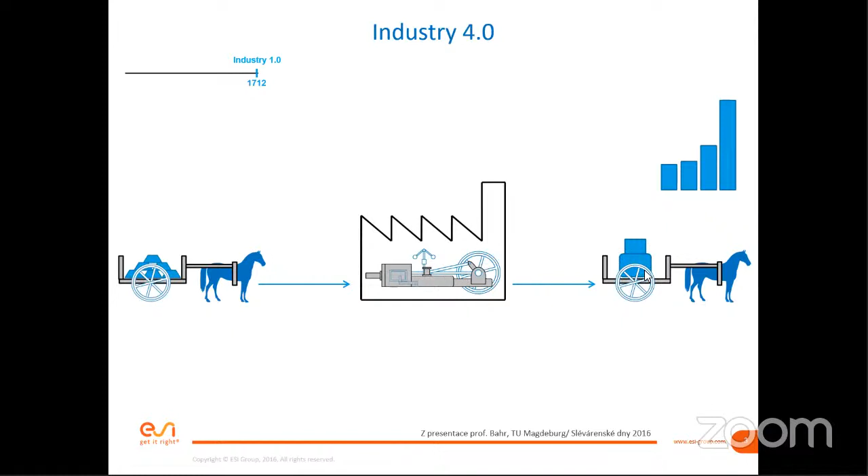In Industry 2.0, the horse was somehow substituted with the car. The amount of input was of course much higher. There was industrialization from the plant point of view — production lines, power plants somehow feeding the plants supporting the production, and the production of the parts was much bigger in amounts and whatever.

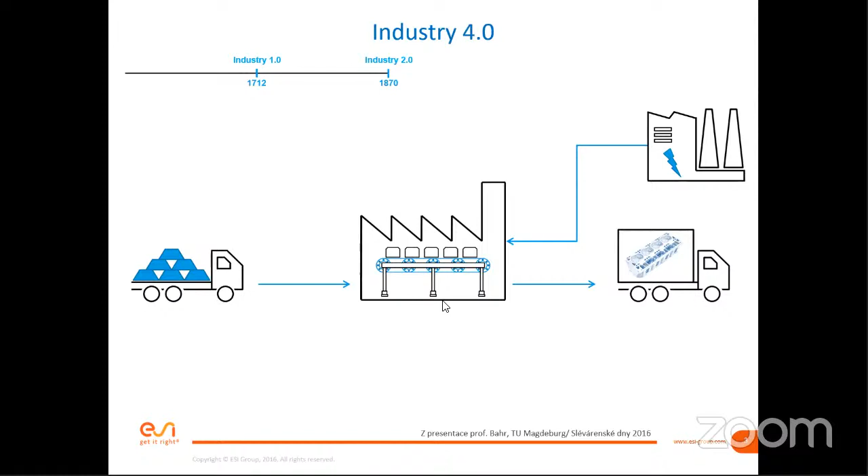This is Industry 2.0, and then what is already more close to our age is Industry 3.0, where all these processes were somehow supported by robots, automatization, and CAD modeling — computer aided design.

Simply the production could use much more tools which came from the automatization and computer aid for the process. And what is...

What is happening right now, we call it Industry 4.0. I'm using the term as if it's tomorrow, but it's already been a few years - it's a known era where we collect the data from all these parts of the production process. We can somehow collect this data, and based on it, use it to optimize the production itself.

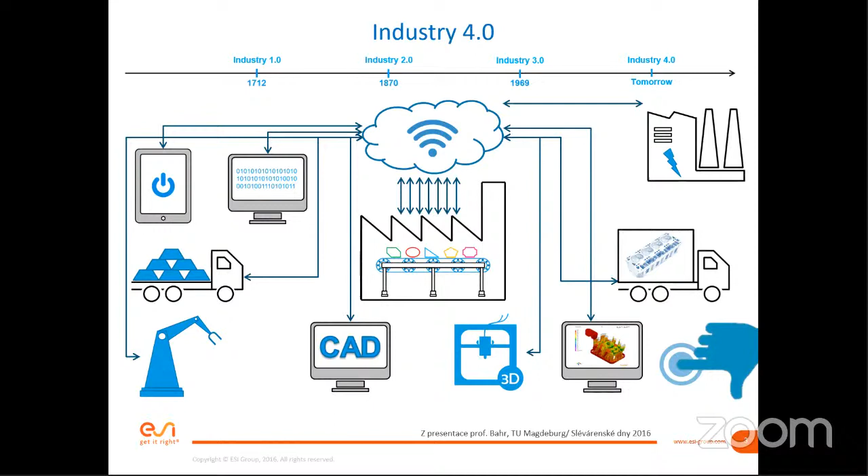So this is something which is very common for this idea of Industry 4.0, to have, let's say, some cloud which works as the one source of truth for a whole process, and can be used for optimizing the process, for improving the process, and that's it basically.

Worldwide, this trend, Industry 4.0, this is a global idea. It's maybe called Industry 4.0, but this is just the name which was somehow thought of in Germany. But any other country worldwide has already presented some strategy for industrialization and for the digitization of the industry - a very similar approach to what was explained on the previous slide. So we really have a worldwide movement, and the industrialization and digitalization is happening right now.

The ideas of Industry 4.0 are represented by 9 different pillars. I can name them: autonomous robots is one of them. Simulation, the support of production by simulation, is the second one. System integration - this is system modeling where you can analyze or describe different systems, hydraulic, thermal, whatever. And Internet of Things.

This is probably what most people connect with Industry 4.0 - the Internet of Things, where you have communication between different machines, between different things, computers, people, of course. This goes hand in hand with cybersecurity, cloud. There are new manufacturing approaches like additive manufacturing, and the 8th pillar can be virtual and augmented reality.

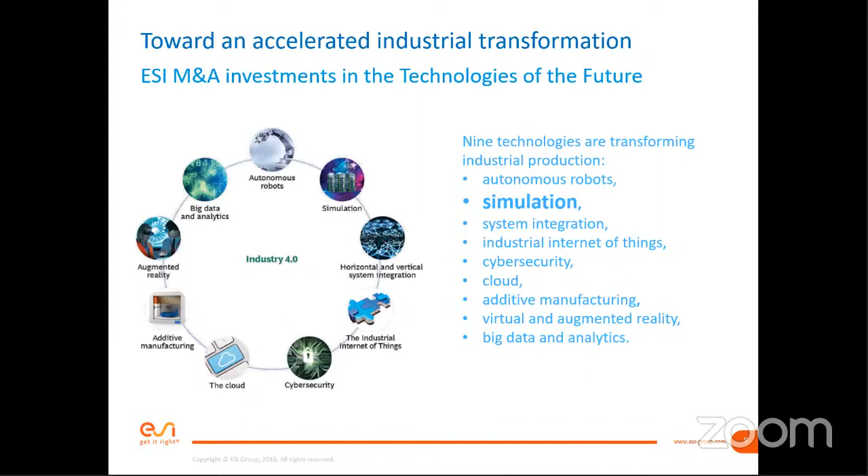And there are companies in the world which offer solutions for each of these 9 pillars. There are also some companies - ESI, my company, is actually one of the pioneers of this approach, to present solutions for each of the 9 pillars, combining them and introducing the most advanced approaches in presenting these Industry 4.0 ideas. I will show some examples later.

This brings me to the concept of the digital twin. Digital twin is something created, or the idea was formed, at the University of Michigan by Dr. Grieves in 2002. It was named at the time 'digital twin,' but actually what it means is that the real space can somehow not be substituted, but filled in with some virtual space approach.

If you, for example, think about a car, these days the car collects data and sends it to the service, and this can apply to everything, imagine with many things in our life. Simply, you have some real thing and a virtual model which simulates the real thing, but not only that - it also uses the real data to simulate it and optimize it and find a better solution which can then be used in the real space again. So it's a combination of the real and the virtual space.

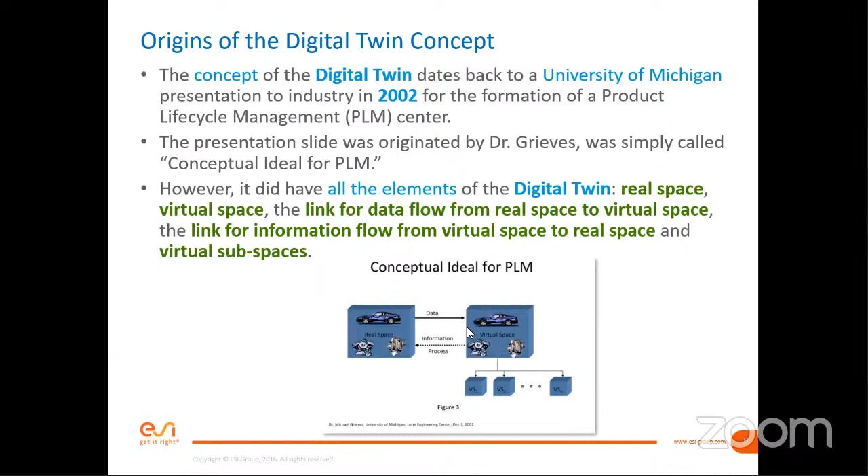If I can show one example, this is a picture from a video which can be found on YouTube, done by GE. This is a steam turbine. I don't know how many similar turbines are installed across the United States, maybe more than 100. This is a nice example of a digital twin, because these 100-plus real steam turbines installed all over the country have a digital twin.

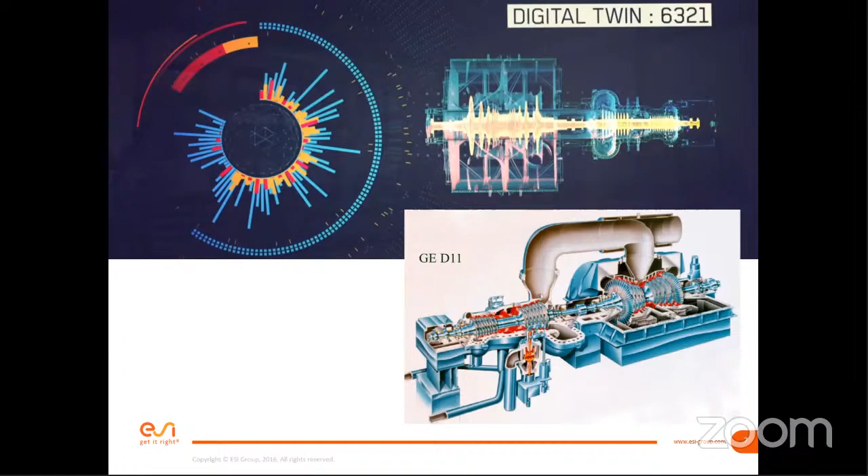It has some mathematical model which collects the data from all these 100-plus steam turbines and uses this data to learn something about what can happen in reality, but in the virtual space. And once it learns such a thing, it can then be used for reasoning, for optimizing the process. We can divide this work into 3 different areas. The first area would be to collect the data and use it for learning what happened, what can happen.

The second thing is the model can use this data to predict some states, to optimize the operation by playing with the steam temperature, rotation of the rotor of the turbine, whatever. Then, of course, it can apply these approaches after some interaction with the people, with somebody who operates it, and really provide improving actions to be used in reality.

But this is a case of turbine steam, one product which maybe somebody can easily think about how this virtualization or digital twin can happen. But if we speak about manufacturing process, casting for example, it's not maybe so easy to imagine how this digital twin should work for something like this.

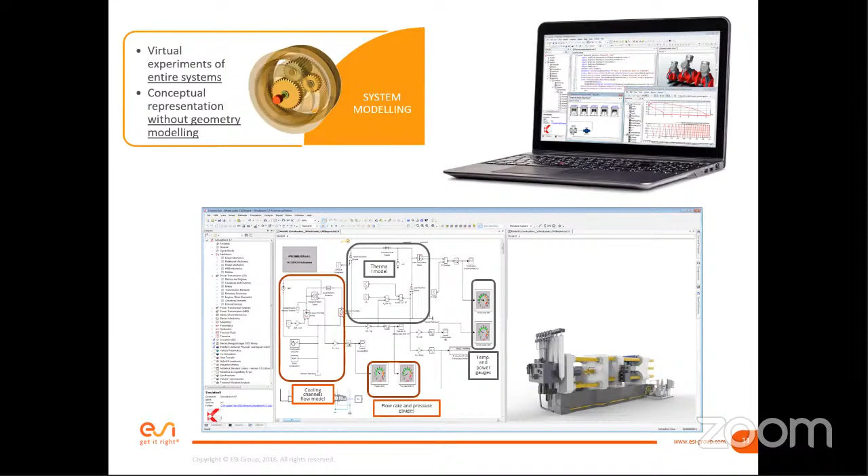Thank you. So we can continue. Okay.

So let me skip to another part of the presentation to introduce the amount of tools which can right now be used by the engineer to switch from the classical trial and error approach to something much different, which can use the advantage of digitalization.

There are plenty of tools which can be used right now, and the biggest advantage is that the process, the usage of the tool, starts in the very first moment of the new part design.

I already spoke about the machine, about how the technology of high pressure die casting works, but let's start from the beginning with the concept of the new part. When you have a new part, the part itself is usually created based on some function, based on some loads of the operation it's designed for.

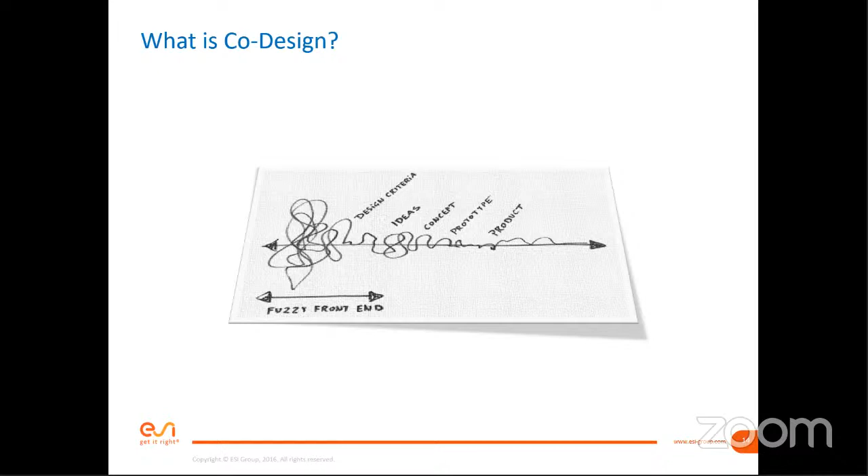So the first thing, and this is the first moment when we can really use the advantage of digitalization, is to use something like the co-design approach of the simulation software, which can be used by engineers and also by manufacturers, doesn't matter, but the best way is to be used by both together when designing a new part. Co-design simply means the approach where we spend most time in the first stage of the process designing the part and using these tools to do it as effectively as possible, instead of doing it without this option and solving many troubles later during the manufacturing process.

You can imagine it in this case, like this casting as a part of some chassis. The part is designed somehow, but when the manufacturers tried to prepare the technology to create such a part by casting technology, it was obvious there were so many problems, so many restrictions given by the design, that from the manufacturing point of view we are simply not able to produce it, or it's too problematic, too expensive, simply not effective and not optimal.

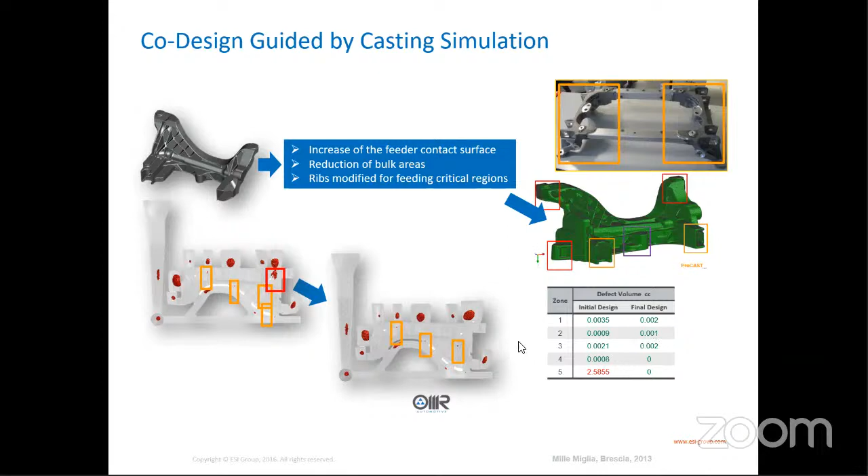You can see that using another approach, what can be reduced is mainly defect volumes, from huge percentage volumetric to really acceptable values. This is the goal, and I will show you how it works on a small example.

This is the case of high pressure casting, some kind of cover with many ribs and different shapes. The casting is quite complex, and parts like this are hotspots from the manufacturing point of view. If the designer puts a hole in this area, it's not 100% certain this hole can be managed during manufacturing. For example, it cannot be cast because it's too problematic, so the casting will be done without the hole, and the hole will be drilled afterward.

Which brings more operations, more cost, everything. So the goal here is to really take into account the castability, the manufacturing process, and design the part a little bit different if possible.

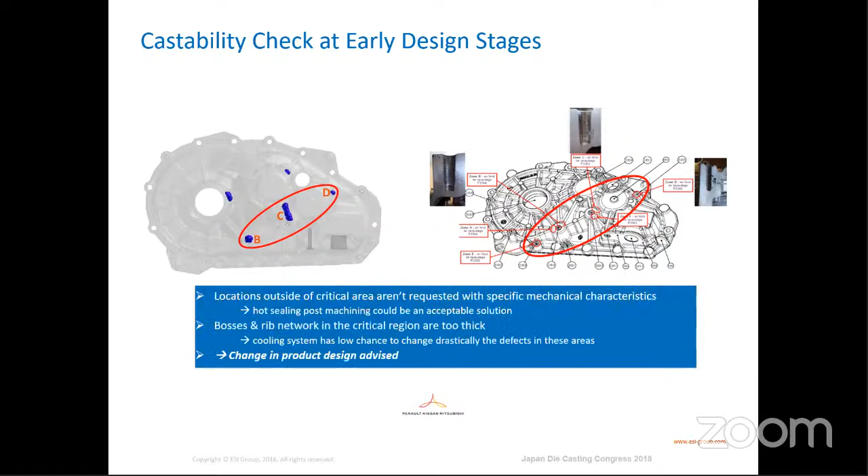And how it works in this case works on 5 simple steps. First, if the designer creates a new model of the part, we only speak about a virtual model - a CAD model prepared in different CAD environments. It doesn't matter. This design is then analyzed from the geometrical point of view.

Based on this first analysis, using very simple automatic tools, a simulation of the solidification is prepared as a thermal analysis of the part. Then the user of this approach has the possibility to review the results for this very short simulation.

Based on this, he will find out what are the critical places of the part, and if possible, in communication with the design department, he can bring some ideas to make the design a little bit different, to simply avoid problems in manufacturing.

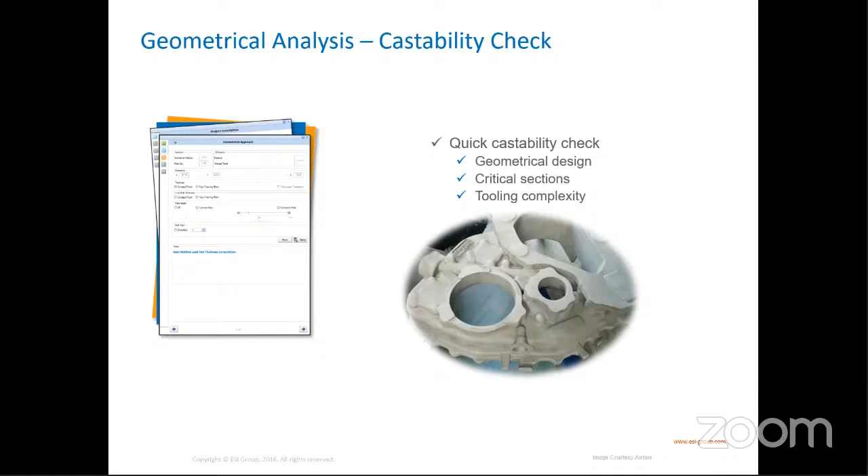So it's not only about the casting itself, but also about the mold or tool which will be used to create it. Just to show you how it can work, we have this very complex casting.

First of all, we can measure the wall thickness of the part. You can see the places where the thickness is thicker, and of course this can be a problem - this different wall thickness for the part. If we see something like this, the goal would be to change the design a little bit to avoid having such different wall thickness in the part.

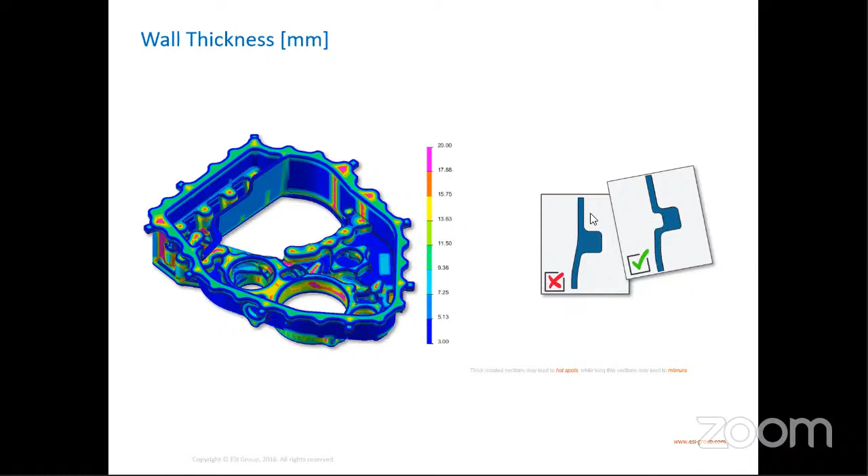Another thing from the castability point of view is the transition between different thicknesses. If we see a case like this, with a thin wall and then a very sharp transition to a thicker wall, it again brings much problem. So the goal would be to think about the design and introduce different thickness transitions using radiuses or other geometrical approaches.

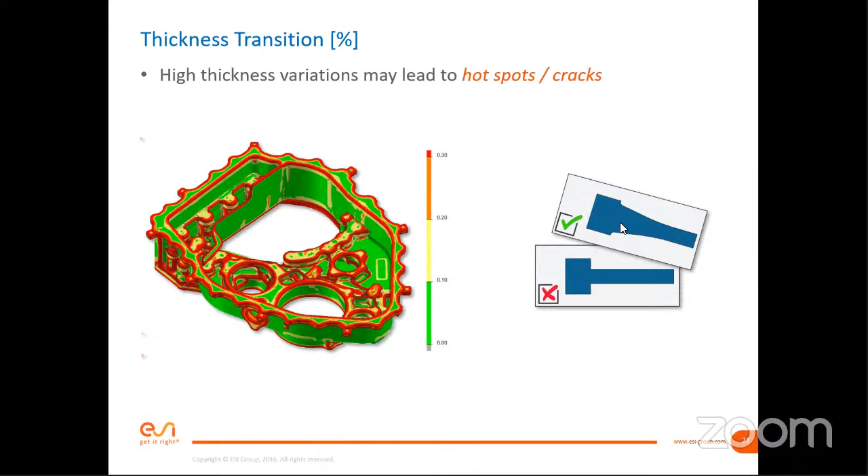So we can see that even comparing two different castings of a very similar part, we can have completely different geometry distribution, which makes one part easy to create and the second part very complex and problematic. That's obvious.

Then we can also do sharp edges analysis. Again, sharp edges are not good from the castability point of view. The goal here would be to create the design as smooth as possible without sharp corners.

And from the molding point of view, with this tool we are able to validate if the part's draft angles correlate with how the mold could be prepared. You can see that if you have a shape without angles, you are not able to produce it, because you can't put it out from the mold. So the goal here would be to do it properly.

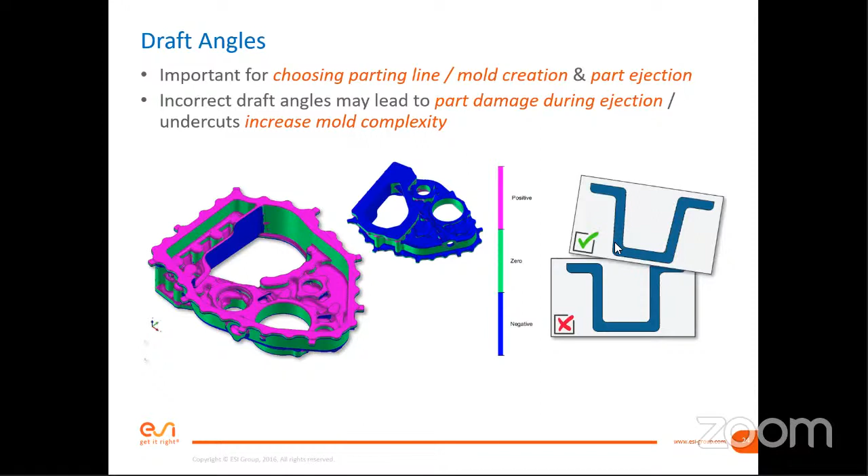One last thing to check is the shape of the mold itself. If you see a casting shape like this, with a very sharp corner in this area, you can imagine how heated up the die will be in this area, because the temperature of the metal during casting - for aluminum about 700 degrees - is much higher than the die.

The die would be at about 200 degrees, and at the casting moment, when heat transfer brings heat from the casting to the die, you will have a very problematic area here, probably connected with porosity formation. So the goal would be to reduce such spots to a minimum, and maybe present a different kind of description of the part design in these areas.

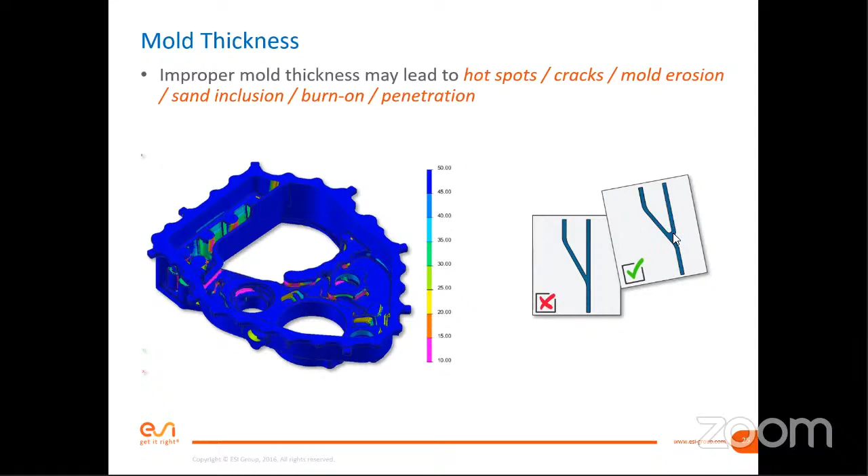And then all this, let's say standard, this geometrical measurement is just a first look on the part design. The second look would be to perform a very simple simulation of solidification of the part.

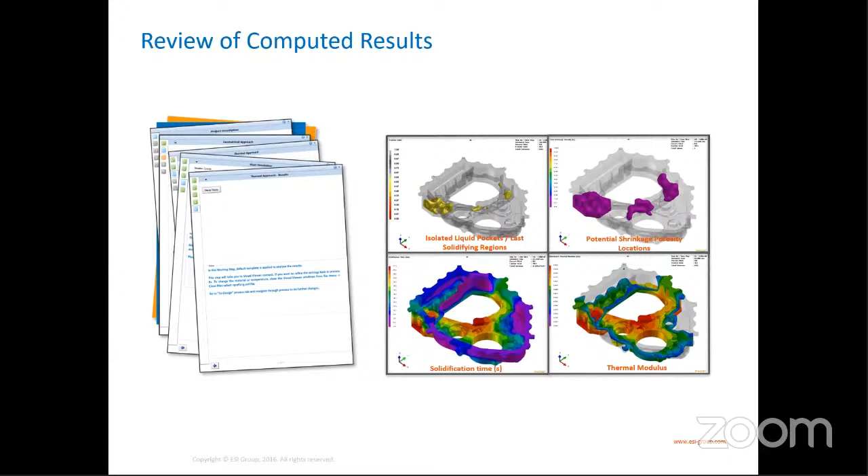Because each material has a different density in liquid and solid state, which brings some problem with the shrinkage of the part. If you perform such a simple simulation of solidification only, one can see quite nicely the problematic areas from the solidification point of view. So this can mean that we have some problems, and to find the solution based on this knowledge, to redo the design, would be the first step to produce the final casting without a problem.

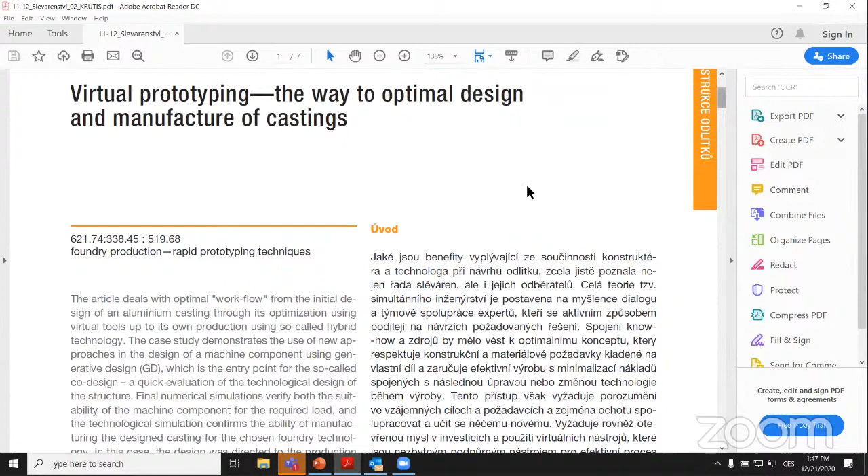Another case would be, maybe let me switch to this interesting article which was done very recently about virtual prototyping. This is a very nice example of using this concept of co-design in combination with an even more advanced approach, which is generative design for the part.

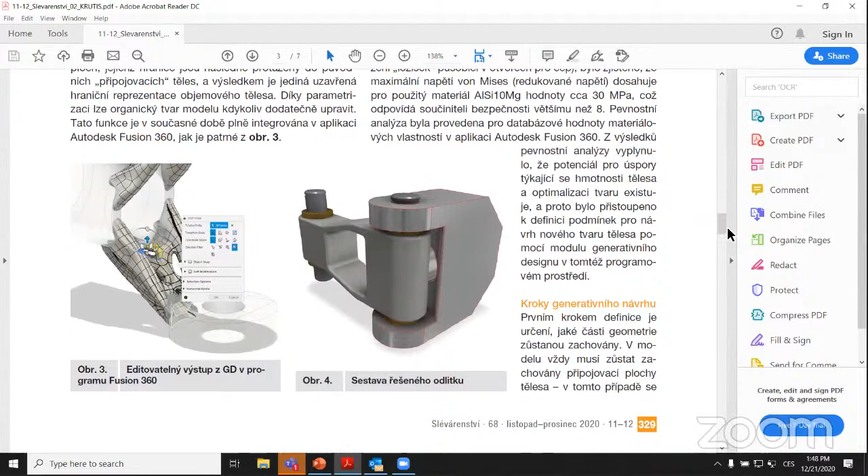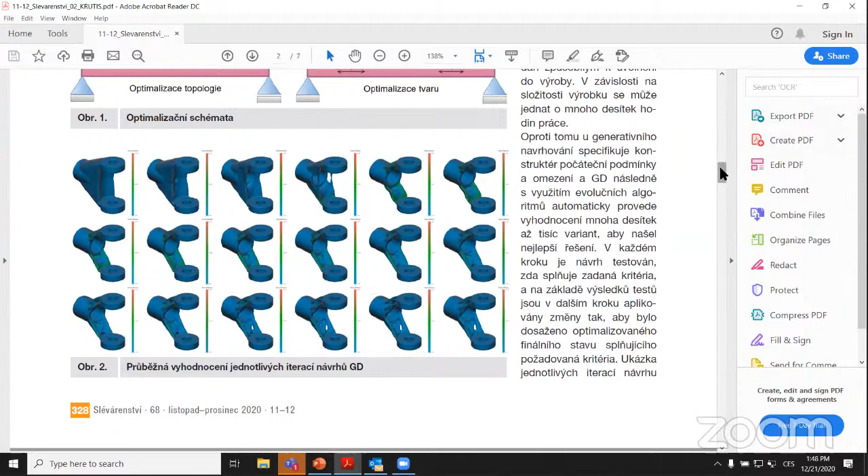It was about such a part. This is an application, and this is a part itself. Based on some load, based on some description of the assembly, a software automatically creates many variants of this part. This is generative design, automatic generative design, and it's another level of computer aid for design.

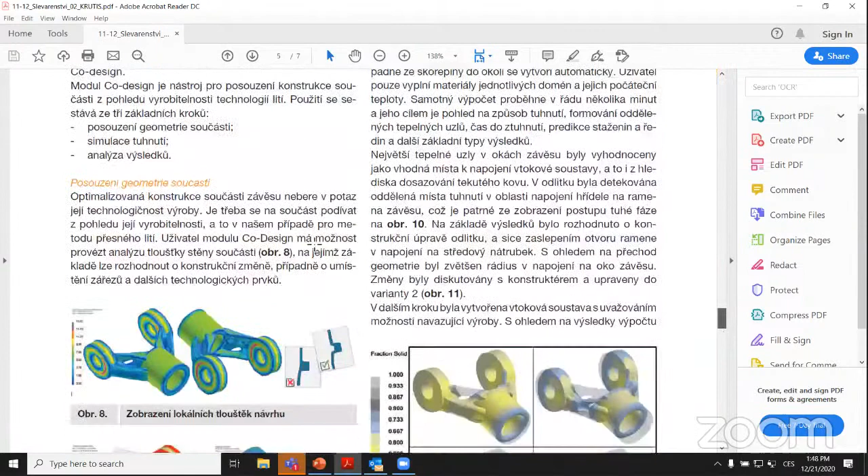Based on this, we choose. This is some outcome of the software. Based on this, we choose some design which was, from the castability point of view, most okay, I would say. Then we go through these geometrical checks and the simple solidification simulation.

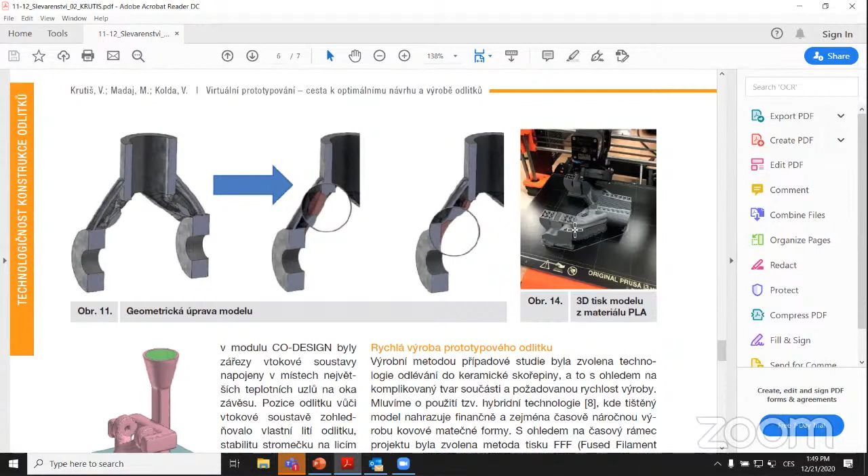And based on the result of this simulation, the design of the part was changed a little bit. You can see some additional material added here and here, simply to let the solidification go as expected. We create the original model by additive manufacturing, printing the plastic model, which can be used then for the casting itself.

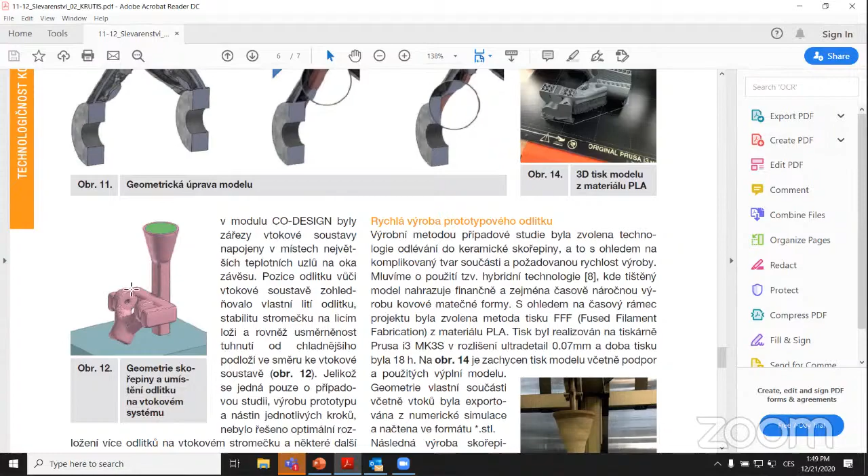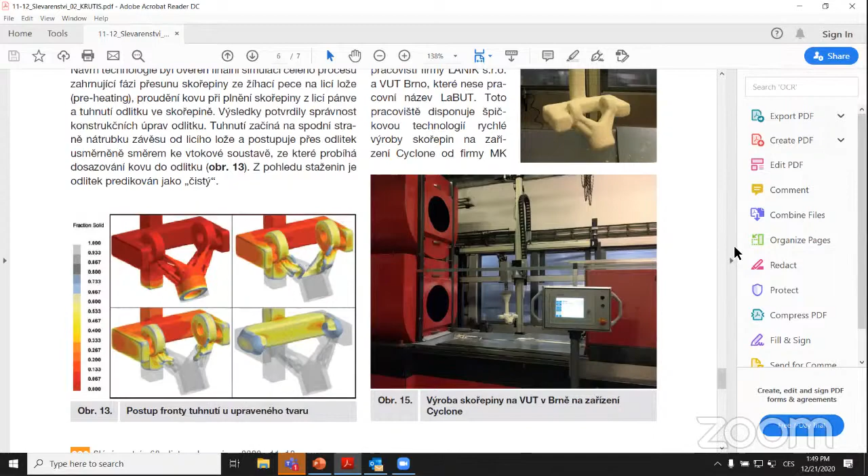Because in this case it used the technology of investment casting, where you put the model into the ceramic shell. Based on the previous simulation, a second simulation was done, which already introduced some gating system, so the part was very clearly produced without any problem. And at the end, it was really done. The prototype was created, and it was without any problem.

So this is an approach which, instead of the trial and error approach used in the past, is somehow able to bring a healthy casting, a healthy part, on the first trial, actually. So it's something which should be very appreciated. Okay, Mr. Kotov, please, you can summarize.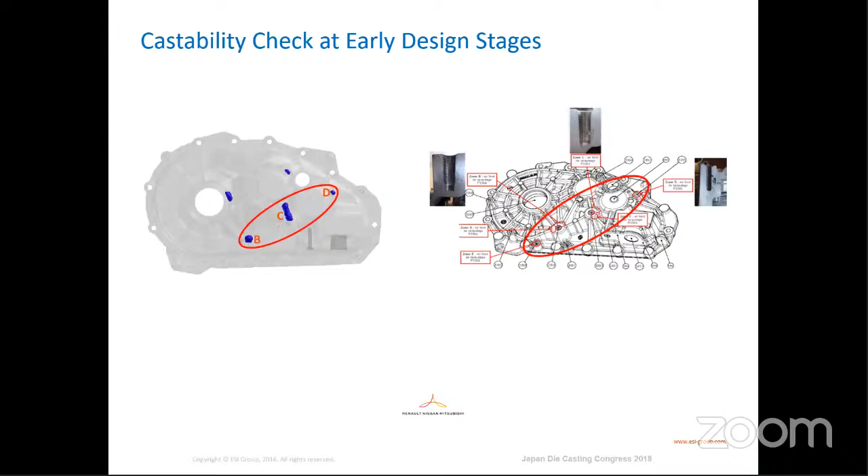Для этого вот как раз один из инструментов, который здесь показан, он называется ко-дизайн, то есть совместная разработка, и она учитывает как конструкторские интересы, так и технологические интересы. То есть идея в том, что вы загружаете в эту модель, в данное ПО, изначальную CAD-модель, которая создана конструкторами, а затем мы проверяем, насколько данная CAD-модель может быть изготовлена.

То есть осуществляется геометрический анализ, это допуски, припуски, литейные уклоны. Осуществляется термический анализ, мы смотрим на индикаторы горячих трещин, на зону, где может образоваться пористость, смотрим на острые углы, которые в итоге приведут к проблемам либо в оснастке, из-за чего пойдет перегрев оснастки, либо в самой детали. И, собственно, правим на этом этапе исходное изделие, исходя из требований технологии.

Значит, после того, как мы осуществили эти правки, мы переходим непосредственно к математическому моделированию самого процесса литья и смотрим, каким образом данное изделие будет произведено. Здесь уже производится полный анализ процесса литья от заливки до кристаллизации. И здесь уже можем изучить не только сам процесс заполнения, но и какое изделие у нас получится в итоге.

Какие у нас будут в детали остаточные напряжения, какие будут поводки. И не нужно ли нам сделать, например, компенсацию оснастки для того, чтобы минимизировать эти поводки, либо провести термическую обработку для того, чтобы уйти от внутренних напряжений.

После того, как мы добились тех результатов, которые нам нужны, мы можем говорить о том, что наша исходная конструкторская модель стала уже технологической моделью, которая не только устраивает конструкторов, но и возможна к изготовлению в литейном цехе.

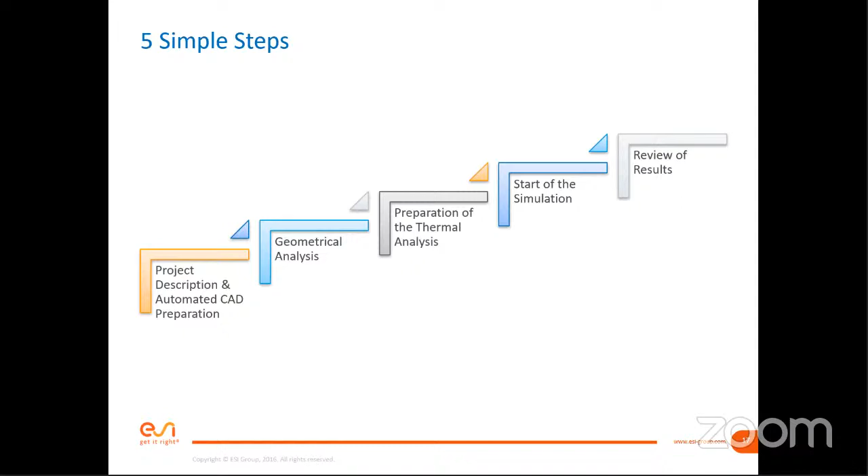Спасибо. So we can continue.

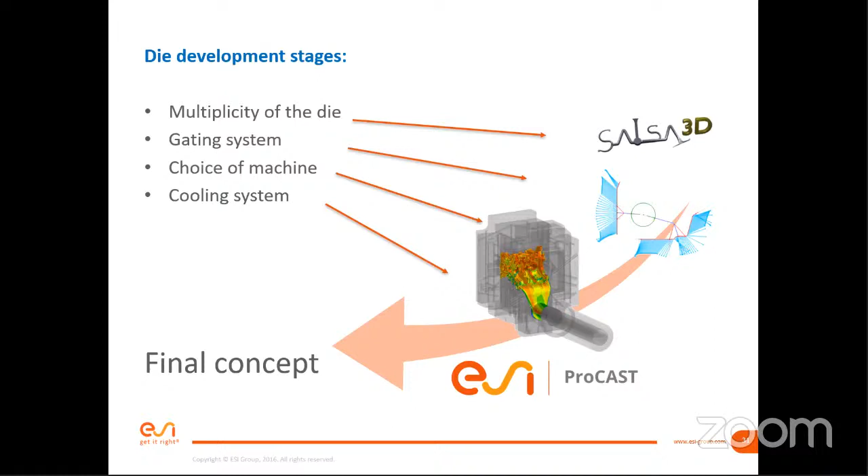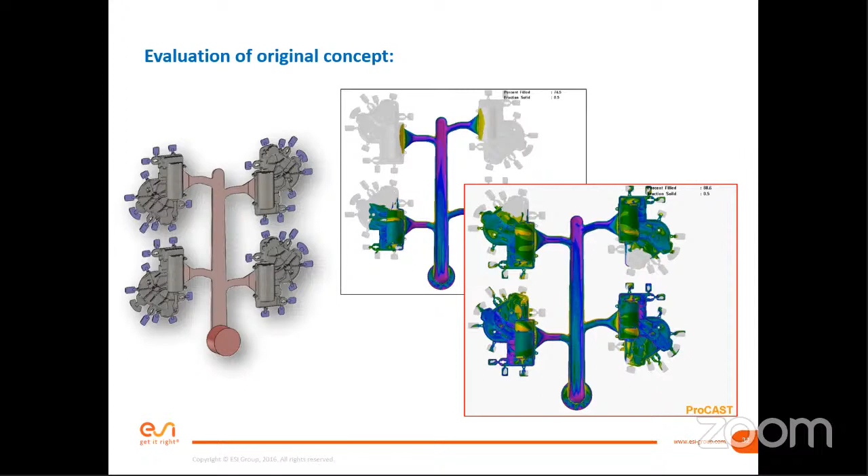This is something like the original design, which the technologist made without using this digitalization approach. He simply used some gating concept from the past, from a similar casting somewhere else, and it brought some problems.

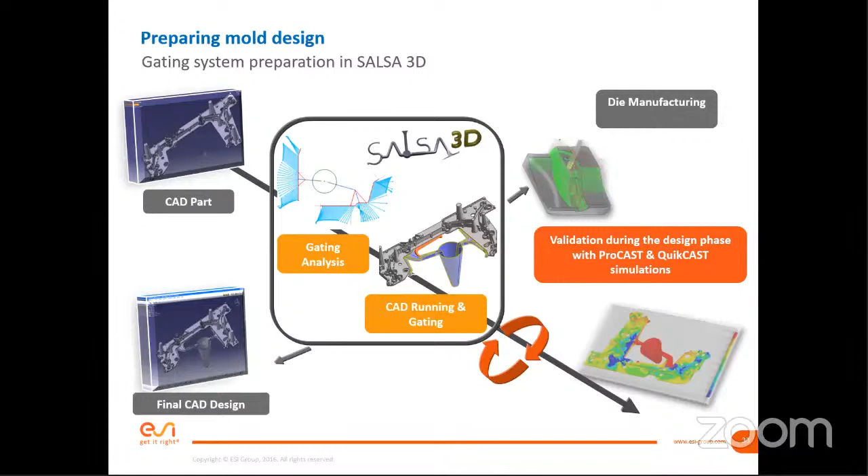In this case, what is possible to do is let the program, the software which can be used as an aid for the engineer application, analyze how the situation looks with different gating designs, for example 5 different versions of the gating system, 5 different ways to get the metal inside the die and create the casting.

And this tool can be used very simply, with very ease. It doesn't need much more than knowledge of the engineer, and it can actually create a CAD model of the gating based on a very simple 2D drawing. So in this case, we have the part in the exact position as it was done for the original concept, but the gating is created with respect to the known problem.

This is not the approach as it should be, because ideally the engineer should use this approach the first time to avoid the problematic trial. But simply it was not so effective in this case. However, this case shows the effectiveness after we implement this tool.

So the way to get the metal inside is simply created based on the 2D sketch of the gating and the knowledge which is somehow implemented into the software - the knowledge which knows exactly how to create the shape of the gate, how to create each gating channel.

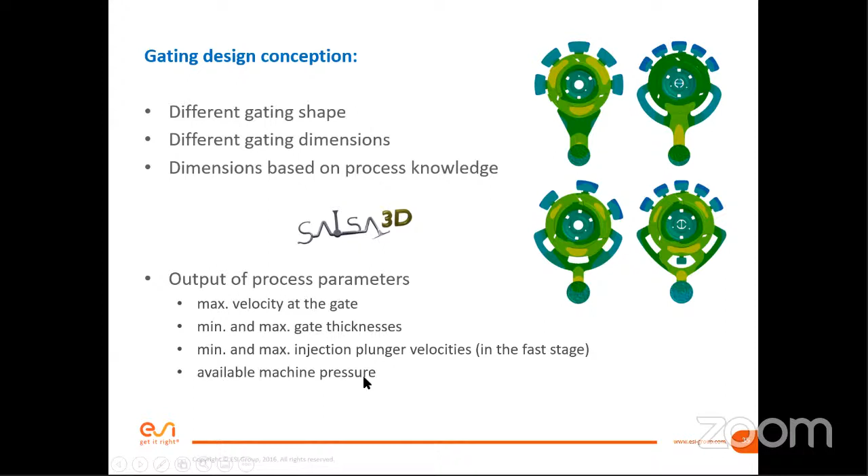By this method, one can analyze very fast in virtual space many different variants of how to get metal into the die, how to create the casting, so many variants which are created very fast just using a 2D sketch done in a CAD environment. And if the engineer does that, the software will give him many important pieces of information which are necessary to know before the production of the casting can start.

The second aspect of this computer-aided approach is to choose the right machine to create such a part, because if you are casting only one part in one die, you need a completely different setup than if the die is, for example, a 4-cavity die as in our case, since the amount of metal is much bigger. You need a machine with much bigger force to close the die and hold it during the filling process.

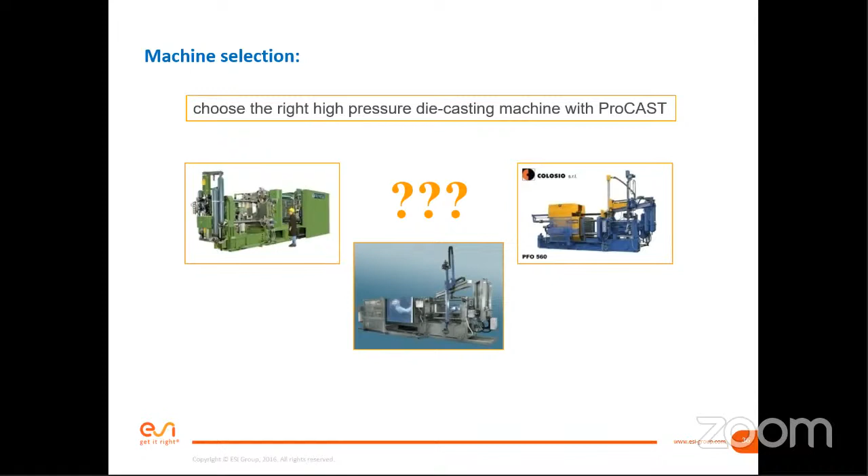So what machine do you need, and do you have this machine in your factory? This is again something which can be answered by the program, where you can see the model is already completed with some description of the chamber. We have a whole assembly for the casting, and we can decide which material and which machine will be used for production from our selection.

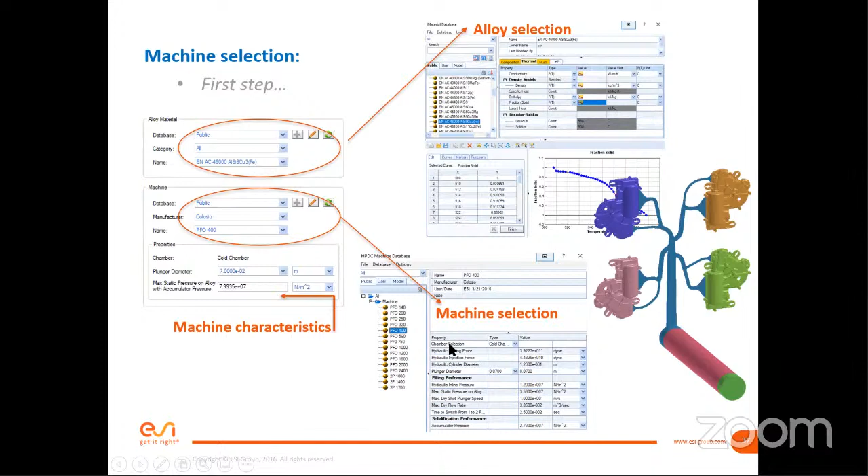Of course, the machine itself can be part of a database in the software with a basic description of the machine. After analysis, once we choose the right machine for the casting, we can see our setup lying within the operating window of the machine, so we are able to produce it without problems. This is again the approach introduced in the software.

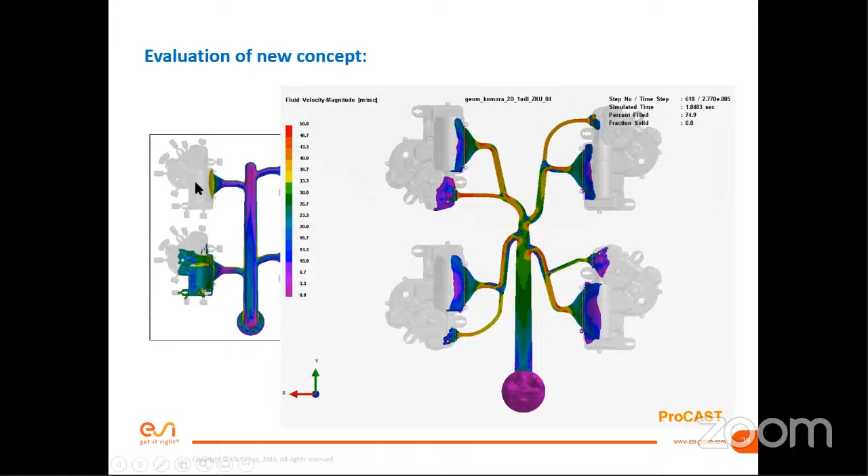If you see the result after introduction of this gating, and creating a simulation of the filling and solidification process, we can see that from the original design, not all the casting was filled - there was a problem with filling, and each casting filled in a different time, which is problematic because you need to know exactly the right time to start the higher velocity of the plunger. So compared with the original design, this new one introduced a much better filling pattern, and reduced the problematic errors created by the basic design.

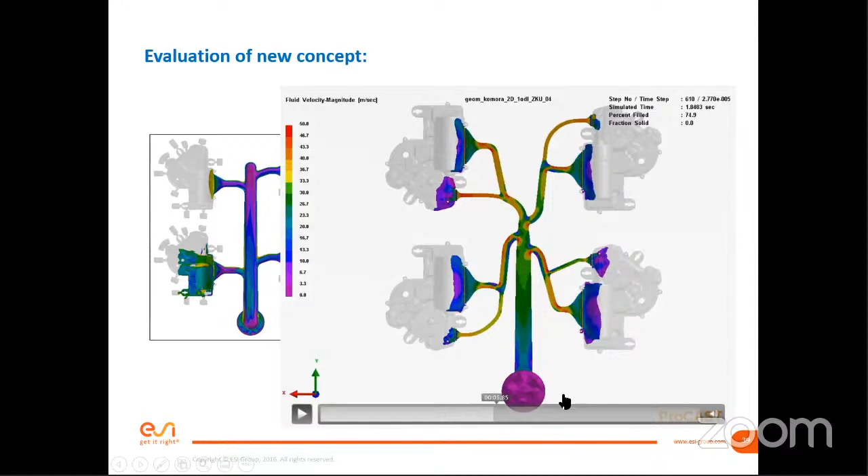It is also quite visible that the comparison between the simulation result and what happened in reality is very close to each other. You can see when the machine was stopped at some point, the metal is in the exact position as it was in the simulation. So it was confirmation that the design produced with this approach is really useful.

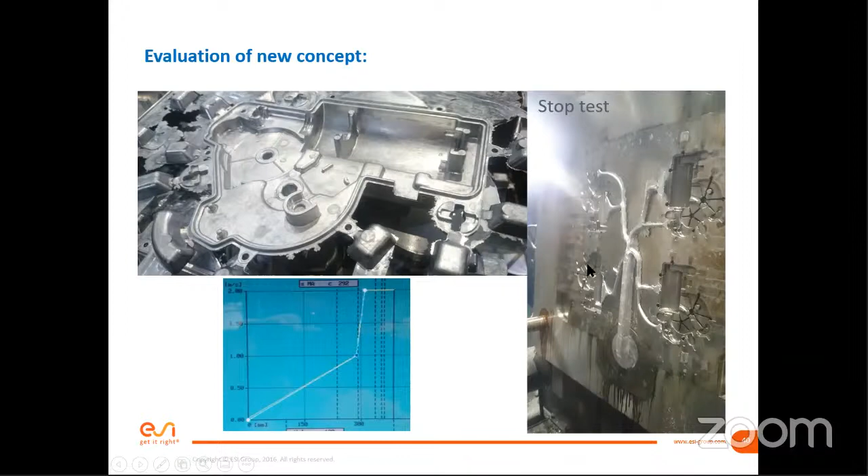The last thing in this block is to know that nowadays, what was prepared in a virtual space can be very quickly transported to the real machine. In this case, you have some description of the piston movement during the filling stage, and the exact curve was simply exported into the software of the machine, which in reality creates the casting, replicating the process from the virtual to the real production.

And of course it can also work vice versa, in case you have problems with the filling. The user or engineer is again able to get the curve, use it in the virtual space, and analyze what the problem can be from the filling point of view, because in reality you don't see what happened inside the die. You can see it only in the virtual space, and then decide based on the visualized filling pattern what to do differently, and maybe even let the virtual space optimize the process based on some criteria.

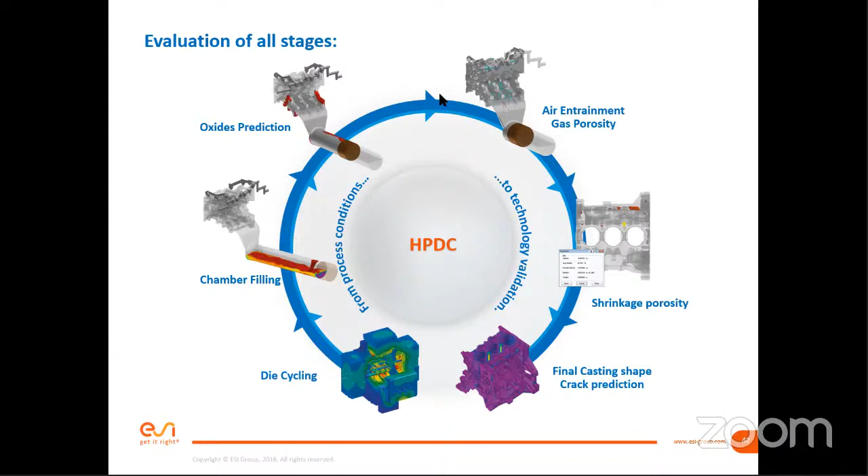Okay, so this was the second step, let's say. In the first step, we defined how the design should be made to respect some manufacturing point of view. The second step is just a tool for the manufacturer to be able to design the technological process itself with the help of computer aid.

The third block would be about description of the whole process, because I mentioned during my introduction of the design of the digital twin of casting process that simulation can be used as a reference for optimal settings for the machine. But of course, if we want to have a reference setup, we need to take into account as much as possible, and describe the process of production of casting very well, with the accuracy as possible.

So for this, the slides which I previously shown weren't enough, because we really need to know the thermal distribution of the die, what happened with the casting during the filling and solidification, but also what happened with the die, because it's thermally heated up and then cooled, so there is some kind of thermal cycle which is problematic for the die. We also need to analyze what happened with the casting after ejection from the die, when the die is open and the casting goes out, and then the following operations. So we need to be able to describe it as a whole.

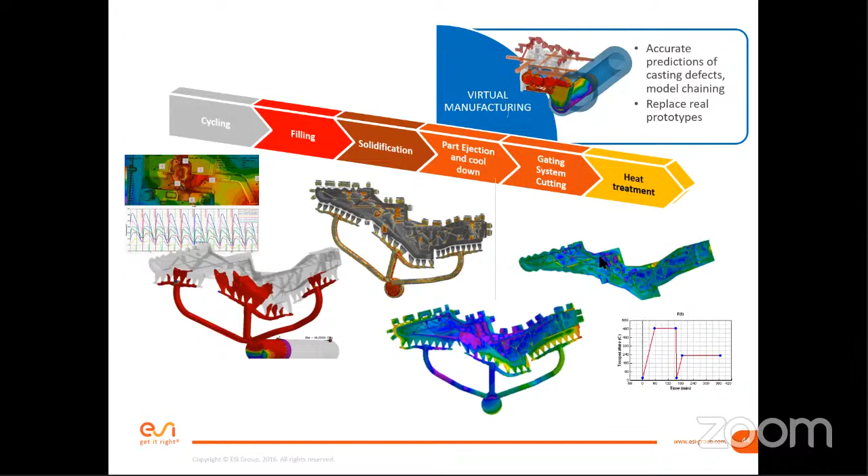This is just an example which really takes into account all the cases. But let me use another case to show the most advanced approach for the simulation of high pressure die casting technology. It's about a battery cover for an electric vehicle, kind of a modern part, as you can say. The blue part, not exactly the one, but very similar.

It's shown here on this graph, where we started from the CAD, performing many simulations, for example cycling with stress, then getting a new kind of shape of casting after the thermal expansion of the die, and then standard filling, solidification, calculation of deformation and stresses inside the die, and then what happened after the casting is ejected from the die. This is the whole process, and only this can be somehow considered as a reference for the process setup.

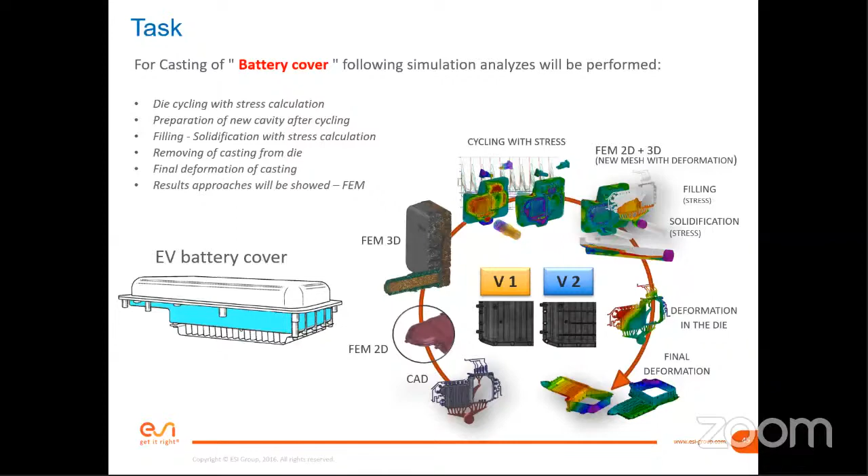In this case, just to be more clear about why the simulation can be a reference, we are comparing two variants of the casting shown here. This is not like an original or optimized variant, it's just two different variants of the same casting, but with some expected behavior which can be known by the engineer from previous experience. So the first is the design from the designer, and the second is the design which already applies some manufacturer view. In this flat area of the casting, some ribs are added to hold the casting to avoid the deformation. This was pre-thinking about before the casting was created.

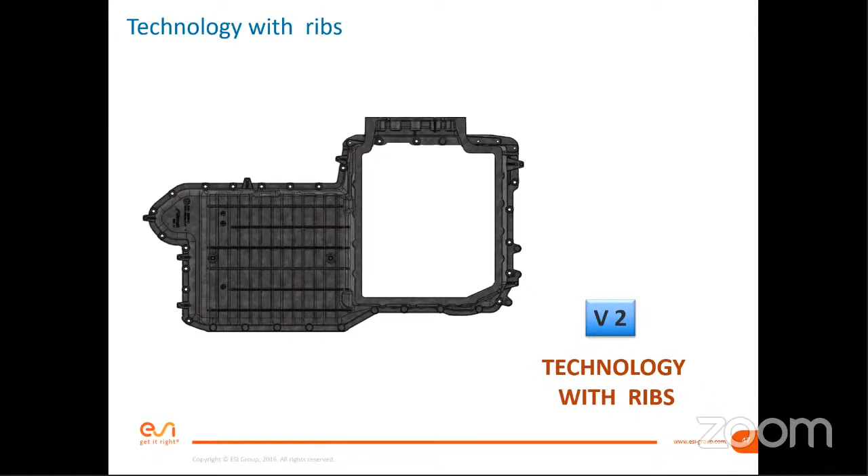But of course, we can simply arrange these variants because we are speaking only about a digital or virtual approach. So then it was not about filling only, but the whole die was introduced with the cores, like all the assembly which is used on the machine to produce the casting.

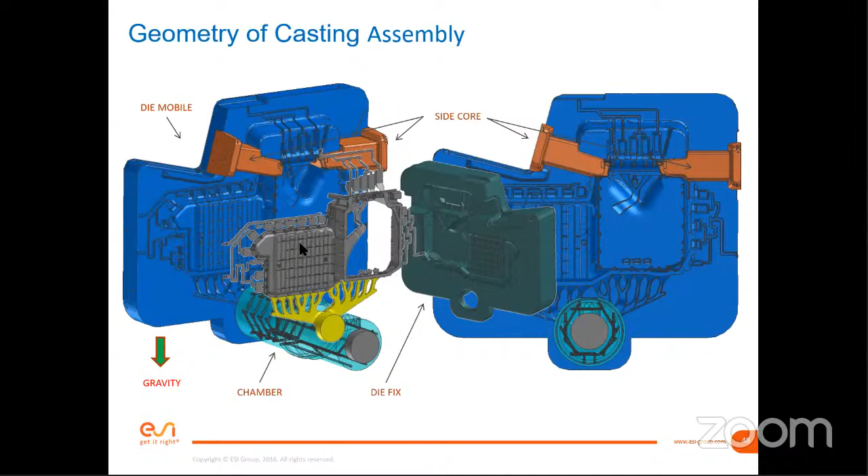And also all the cooling channels, because the die is completely drilled, because we need to somehow be sure that the casting is having some pre-described temperature. This die is permanent, but that doesn't necessarily mean it can be used forever. With the influence of temperature from the casting and from the process itself, it's degraded, and then it can crack or be destroyed. So these channels are the way you put the material at a temperature which is somehow okay.

And this is also introduced in the simulation, so the simulation really describes the real setup.

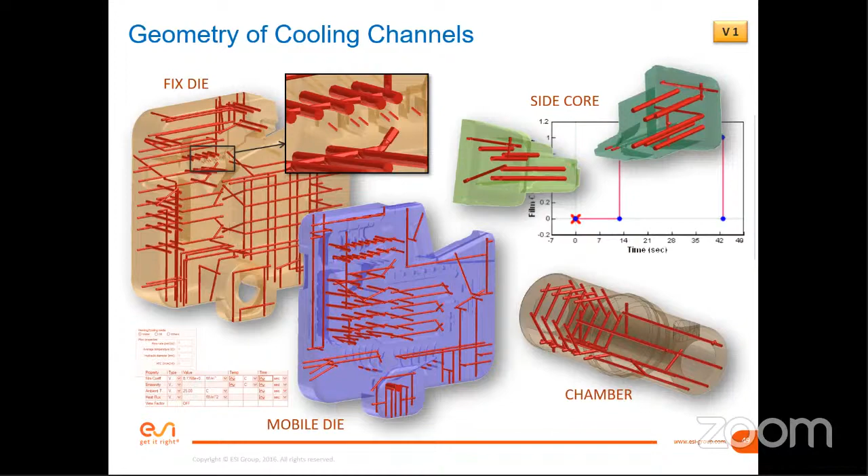So we can see the final state of the die after some number of cycles. Each cycle brings some heat up of the die, and each cycle brings some cool down using the cooling channels and the treatment of the surface of the die.

So in the first stage of the simulation, we are looking for the steady state. If we have this steady state, we can say that we know the temperature distribution of the die, and we can continue with another simulation.

And this cycling is presented here. You can see we are in the 5th cycle now, and you can see how many cycles are calculated - it's probably 10, and by 100 times magnified you can see the thermal expansion of the die. So the die is really heated up, and it goes bigger because of the thermal expansion.

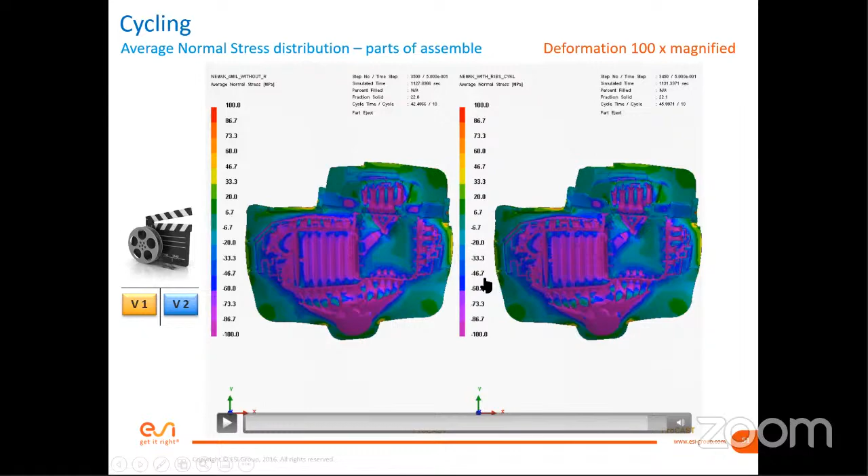After this calculation, from the zero model of the casting, a new model was closed, which also takes into account thermal expansion of the die. And this new model was used for the calculation of filling and solidification, like it is visible on the video.

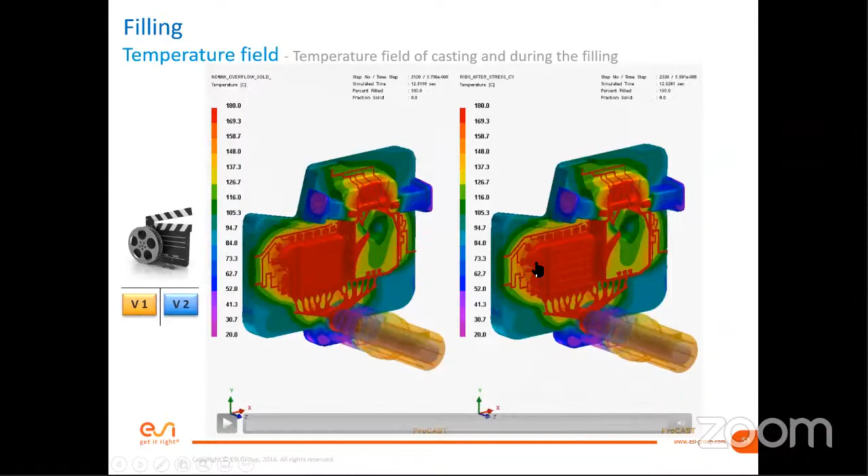So we can see both variants are very similar from the filling point of view, but we can see how different they will be from the stress and deformation point of view.

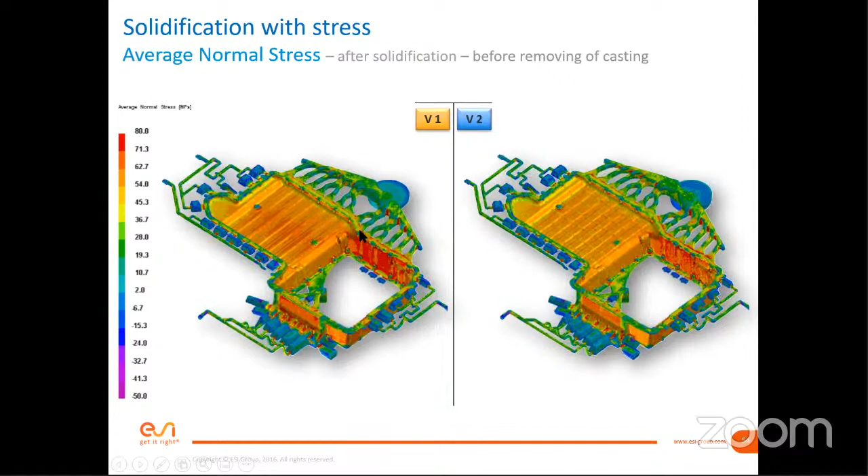Before the casting is ejected from the die, we have some distribution of the stress, and then the casting is removed from the die, which brings some spring back effect - meaning the stress generated in the die relaxes and becomes deformation. We can see the deformation on the slides.

It's so visible how the first variant without the technological ribs is bending a lot compared with the second one, which is also bending, but with a very big difference here.

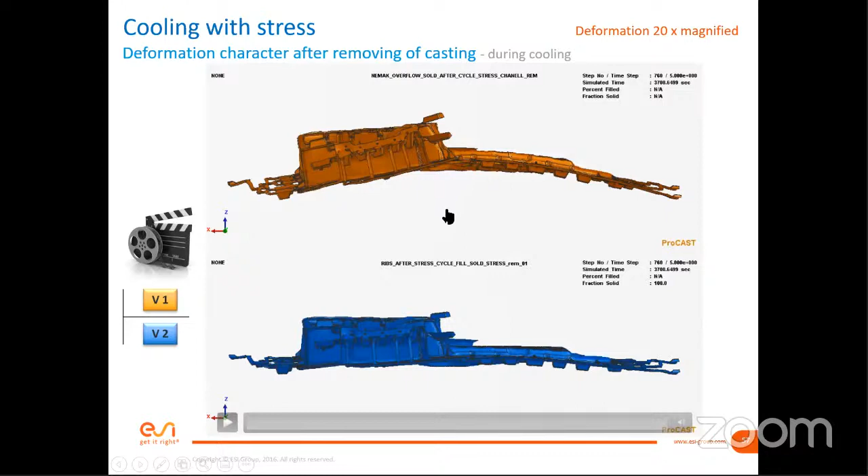If we check the situation from another view, you can see the bending effect, which is enormous here. Of course, this is not the bending of the real casting - it's 20 times magnified - because it's not so visible just by the eye, but it's visible here.

And of course, with bending like this, there is no way to assemble this part of the battery with the second part of the cover. So the problem was having this bending - it was really not acceptable.

You can see during the virtual phase, without preparing any real casting, that simply you cannot achieve the goal without this supporting technological rib.

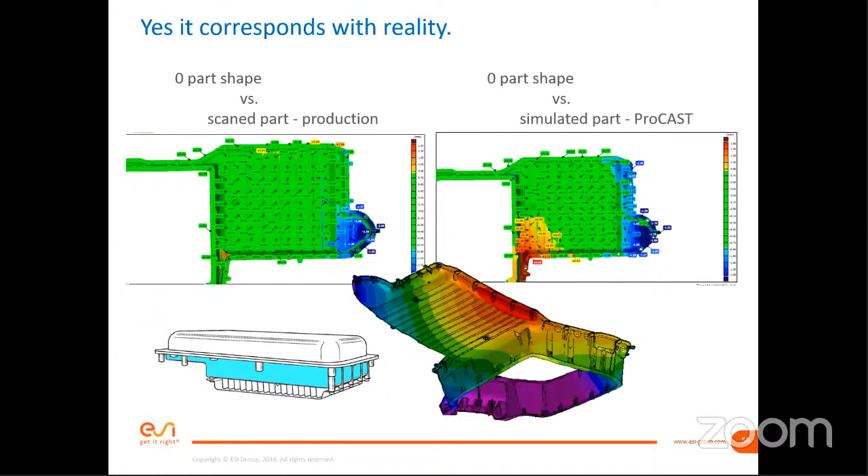And again, you can even play with the system itself - you can play with the cooling intensity for the die, you can play with many different things to prevent this bending effect. Even if you have this rib, you could see that there is some bending of the parts. This can be somehow solved by playing with the setup.

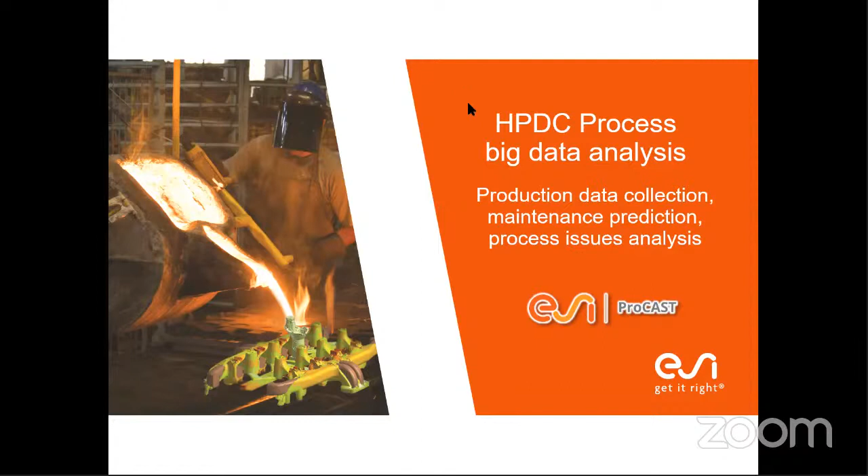So the whole time I spoke only about the simulation, like this part when I introduced the digital twin of the casting machine. This is something just to understand that the simulation is used here as a description of the reference setup of the machine.

Right now, we will also introduce the way how to collect the data from the machine and then analyze it, and see the differences or deviations compared with this reference system, because of course it's not so easy to simply use the data coming from the simulation, use it for the setup of the machine, and then produce healthy casting. That is not the case.

In reality, there is an operator of the machine. There are many different conditions of temperature, of production values of the system of the machine. So in so many cases, the situation simply has to somehow be improvised, but we need to learn from this. By collecting the data from the machine and analyzing it, we are able to learn, to find some connection between the production data and the defects of the casting, and the last block will be about this analysis.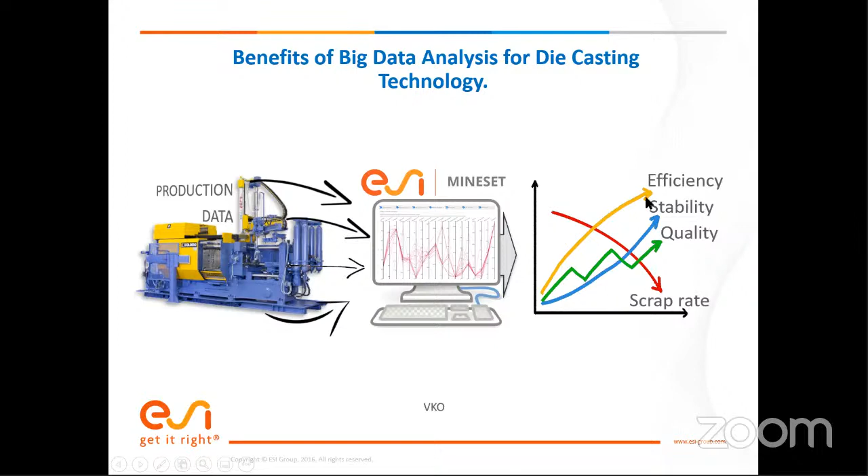So again, to use the production data to go through some big data analysis tool, and then increase the efficiency, quality of the casting, and decrease the scrap rate.

So this approach, which will be presented here, is the MINESET approach. This is a software which uses machine learning, data analytics, and data visualization. The visualization is a big part of the casting process here, because of course, if you have data and you are not able to visualize it, you don't need to have the data.

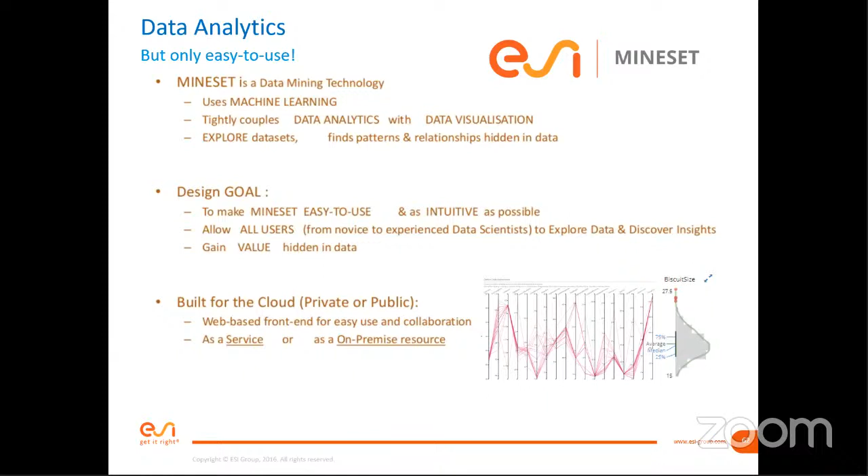So this is a big goal to achieve here: to have an environment which really gives the user or engineer the tools to visualize the data as nicely as possible. And of course, to visualize the data, one can use many different kinds of approaches, graphs, different kinds of visualization here. I will go through it.

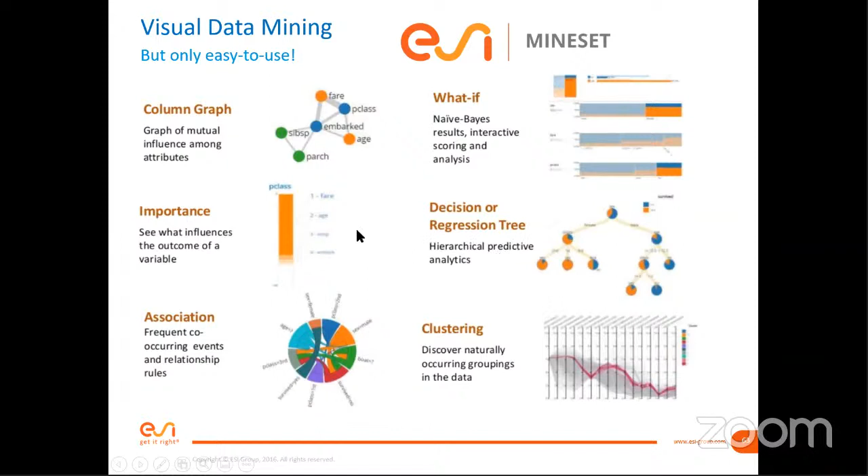But the first and most important thing before we can speak about big data is to be able to connect the data. Of course, the machine, a high pressure die casting machine, is producing, for example, hundreds of castings per day, maybe thousands. It's really shot by shot - one shot, one casting is performed in under 1 minute. It can be so.

You have really a huge amount of data if you want to trace each casting. If you want to trace it, you need to somehow mark it, and there are plenty of ways how to mark the casting. But in this case, it's one example, and each casting which is produced has this mark, and the mark contains the full description of the setup of the machine.

So within this mark, you can find out the temperature of the metal, you can find out the temperature of the cooling media and the amount of cooling media going through the channel. You can simply find out everything - you can see the velocity, you can see the pressures, everything.

And then, of course, you can connect this data from the machine, from the production, with the quality data which you get after you produce the part and validate the part, make some tests, and validate the quality.

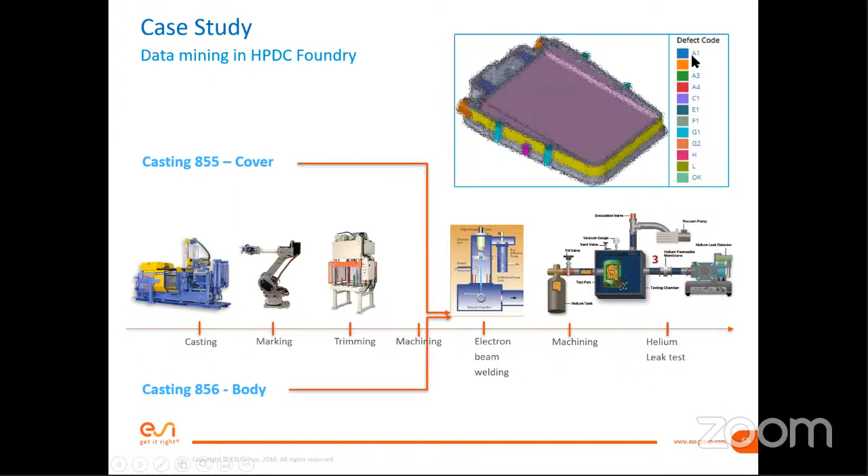And you can see that there are surfaces on the casting which are somehow named by the defect code. Then you can see the amount of parameters which are going through from the machine.

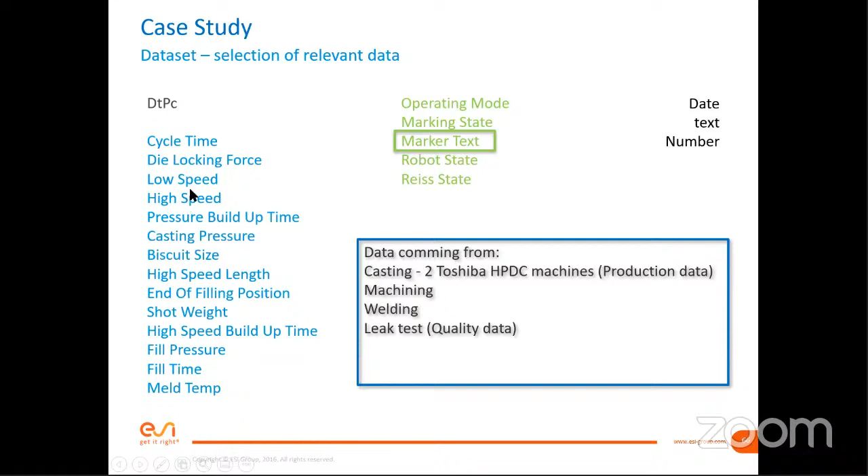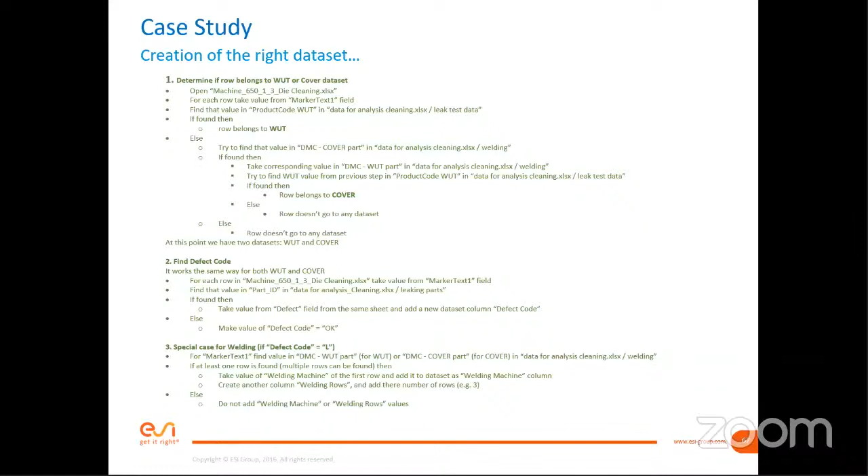We simply need to handle all this data somehow, and here this slide shows some mathematical logic behind the preparation of the data for the tool. Because of course you have some production data, but then you have quality data from the machining, quality data from the welding, quality data from the leak test, and all this data has to be somehow connected based on some common value - here the number of the mark from one and another casting.

And then you can analyze. So this is how the environment looks. It creates some basic analysis using a standard Gauss approach - like you can see the average values of each of the parameters.

And for example, here we can already see something interesting, which is high velocity of the plunger, high speed. We can see that we have two maximums here. Knowing that the part was produced on two different machines, T6050C1 and T6050C3, we can see there are two different kinds of setup for the machine which can produce the part. Knowing that, of course, there was only one prescription for the process - not two. So for some reason the approach was changed, and one machine uses a different speed of the plunger.

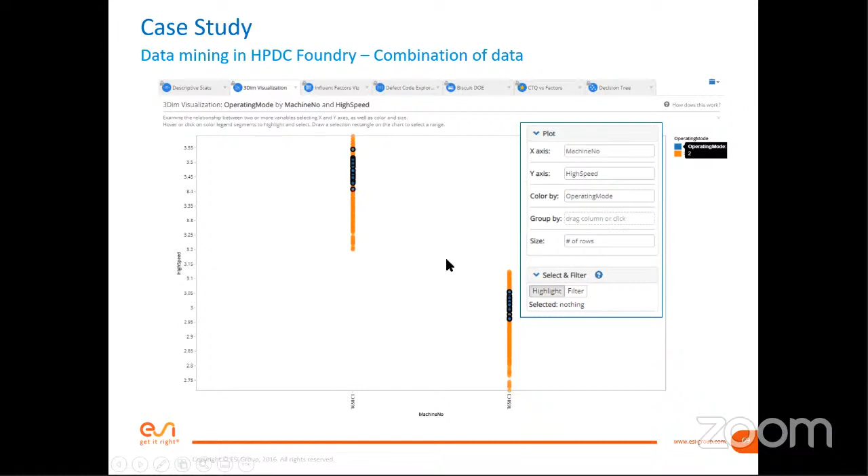It goes from 3.5 to 3.2 or thereabouts in the first machine. Of course, we can also have healthy casting here, but does it cause some problems? Does it create maybe some defect which this machine cannot handle? Maybe we can analyze this.

That's it actually, this is the analysis. We can see the defect code here, and if I run the simulation, I can for example choose some defect and see what combination of the parameters of the machine leads to this defect. And if I see that one defect is caused only by high speed, I can say okay, this setup of the machine is wrong, it needs to be changed, and it doesn't correspond with the reference setup, which was somehow validated and found out thanks to the simulation approach.

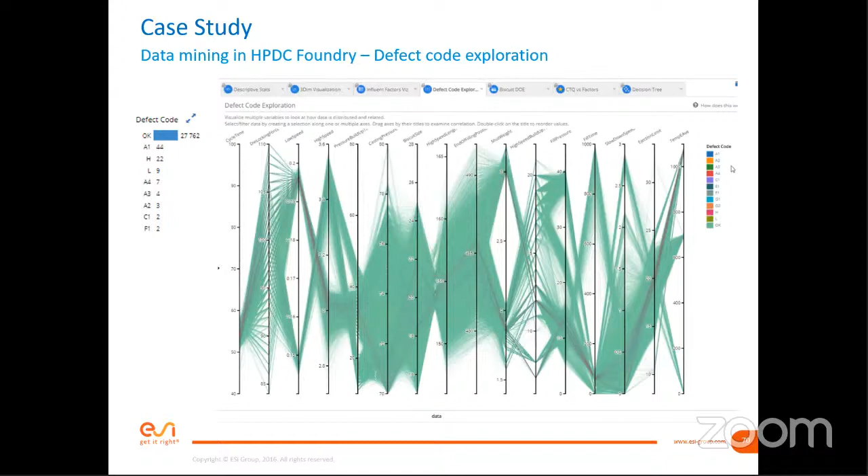So this is simply, for me, a connection of the real data and the simulation or the virtual data here, in this case for a high pressure die casting machine. It's not maybe as clear as it was in the example of the steam turbine, but this is simply the approach which is somehow called digital twin for manufacturing process, connecting with the casting.

Just to mention, we are right now part of a government project in Czech Republic, where we are really trying to connect all this together to have, let's say, a smart die - this is the name of the project. And the ultimate goal of the project is to be able to predict, measure the data of real production, and predict based on the measurement of the data, the die life cycle, the fatigue of the die, because of course this is the main goal of the production - to be able to use the same die for as much casting as possible, because what is most expensive here is the die itself, made from special materials and quite expensive.

So this is all from my side. I believe it was somehow interesting for you. I will just let Mr. Kotov summarize the last part, and then of course if you have some questions we can go through it.